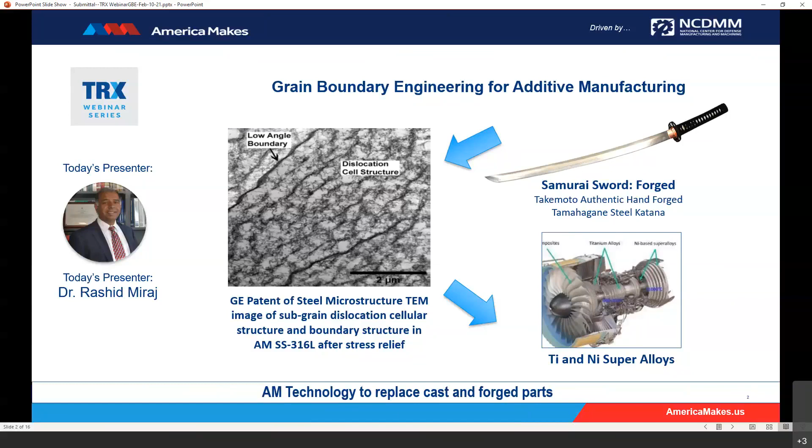Did you change the page?

Thank you. So what problems will be addressed, what objectives secured, and what solution employed? As we all know, AM metals exhibit cracks, low toughness, low plasticity, high residual stresses, and sometimes problems with weldability. Our goal is to improve build quality and performance by varying the AM process, triggering the creation of precipitates, employing cooling strategies, exploring the use of inclusions, all the while considering the effect of defects to secure preferred microstructures.

Our solution seeks to supplement ICME technology with critical modules that address melt pool engineering, grain boundary engineering, phase change, diffusional creep, global-local models, and material characterization and qualification. Tools will optimize grain boundaries, formulate alloy designs, improve microstructure, and identify process parameters to build quality parts.

Well, how will this be possible? Well, I'm glad you asked that question. The ICME tool will accurately predict AM build outcomes, including effects of defects. EBSD visualization software will capture microstructure. Voids and other anomalies will be evaluated. Grains and grain boundaries will be assessed. The impact on quality and life will be quantified.

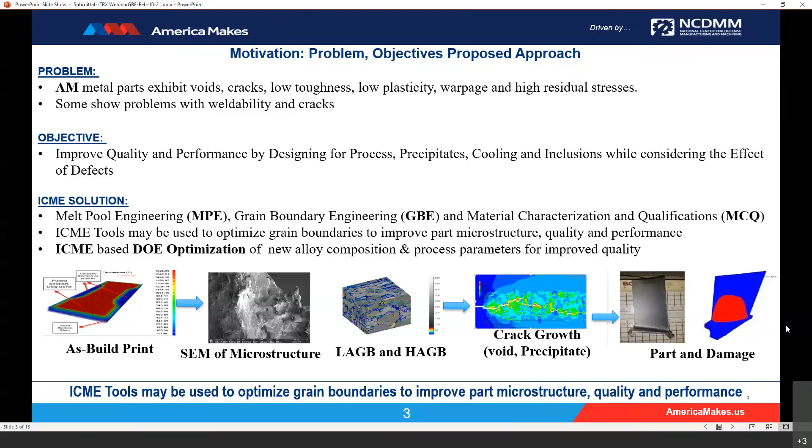So what's the role of ICME in this process? Okay, let's say this one more time. ICME will provide the framework and integrated platform to support melt pool engineering, grain boundary engineering, and material characterization, which will allow engineers to consider grain size and grain boundaries, virtually conduct the build, identify defects and causes of defects, visualize the microstructure, explore options to address microstructure, i.e. alter the print path, add nano or microparticles, to ultimately modify an alloy design and to find the right solution.

The good news is that we are not alone. Experience has shown that ductility and toughness can be addressed by phosphorus and sulfur, durability by chromium, bonding and diffusion by nickel, and there are many more options in the toy box to get the results we'd like. New alloy composition and design would include the effective powder composition, size and distribution on microstructure, effective inclusions on polycrystalline material, and desired improvement of material properties and performance, even fracture and fatigue.

The box at the bottom of the page captures the AM ICME approach and what will be manipulated by tools for grain boundary engineering and new alloy design. As you can see, we can manipulate the print path. We can explore thermal transport, including the development of process maps and the impact of not only inclusions and precipitates, but post-heat treatment, and in some cases, in situ heat treatment.

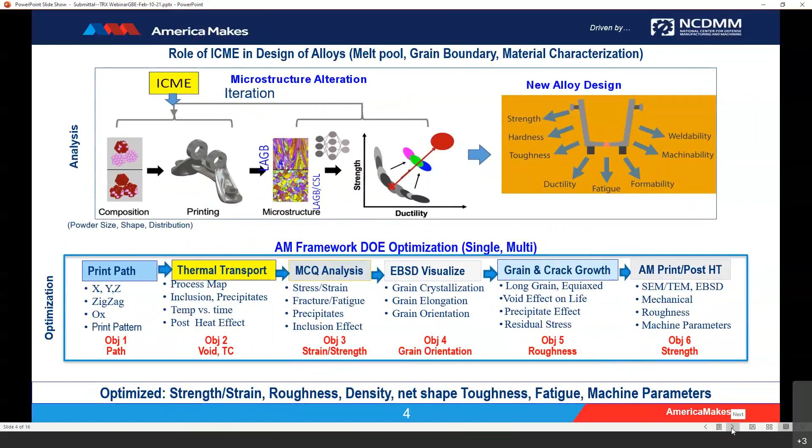Thank you. The reference methods are applied individually and in collaboration with each other, which sounds like optimization. ICME-supported sensitivity analysis and design of experimentation will work to identify an ideal combination if it exists. Solutions may be optimized for strength, strain, roughness, density, toughness, fatigue, and machine parameters, from net shape and warpage all the way to alloy design. Thank you.

Most defects resulting from AM processes are related to thermal behavior. Swelling, keyholes, humping, unfused, balling, delamination are all common concerns related to AM metal. Our thermal management module, TNG, which has been validated for titanium, can predict the dynamic evolution of the melt pool in terms of depth, width, and length. TNG predicts thermal history, thermal state, and material state, and visualizes the heat-affected zone.

The tool can be used to define a dynamic process map that relates balling, humping, keyhole, unfused powder, no melting, incomplete melting, overheating, to laser power and speed settings, or other critical parameters. That process map is shown on the right, and it shows the areas that are stable and unstable in terms of those process parameter settings. In the current example, the zones of stabilities and instabilities were validated for a single track of laser moving at different power and scan speed settings. ICME tools predict manufacturing anomalies and the effect of those defects, as well as identify solutions.

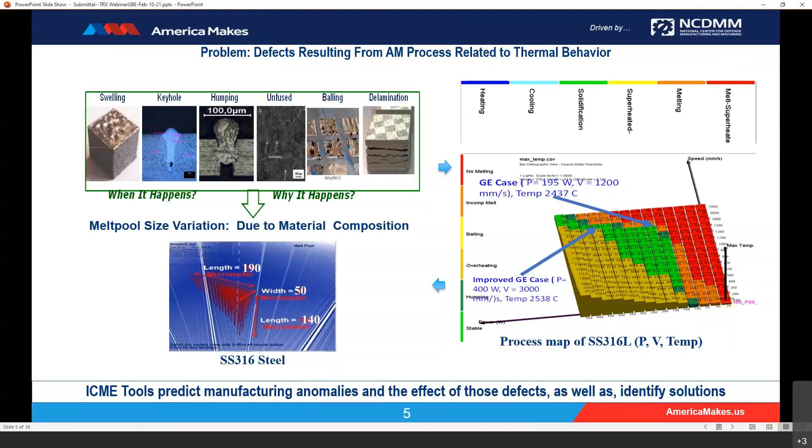ICME thermal management and melt pool engineering exploits the microthermal transport of steel. The thermal history of the three different steels are presented on this slide: stainless steel 316, based on the GE patent; maraging steel, based on the Damascus steel template, talked about a long time ago by Mr. Ashby; and our ICME optimized steel design. As you can see, the GE patent strove for improved strain. Historically, Damascus steel is always explored or driven by the desire for increased strength. Our proposed optimized design tries to grab the best of both worlds based on the strategy we just laid out in previous slides.

When reviewing the thermal history, the highest temperature for GE stainless steel is 3,102 degrees Celsius and 2,000 degrees for maraging steel. The silicon oxide precipitate in the GE stainless has an exothermic effect on the thermal process. The martensite in the maraging steel has an endothermal effect, which causes the temperature to be lower.

From the histogram, it can be seen 36% of the powder remains unfused for the maraging steel as a consequence of the endothermic effect of martensite, which takes out all the heat and does not allow the cooled powders to join or fuse together. For the GE stainless, the percentage of unfused powder is almost zero. This is because of the exothermic effect of silicon oxide, which provides the heat to melt and fuse the powder. The uniqueness of this exothermic effect is free heat to be used in an engineering manner.

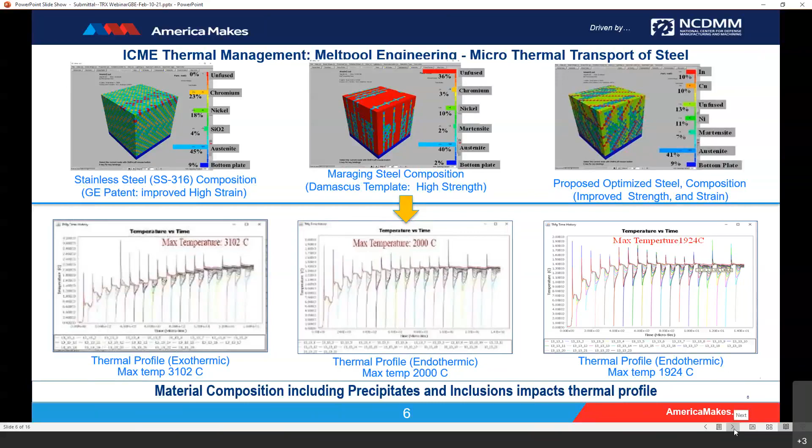ICME prediction and validation of the thermal state, material state, and mechanical strength. Recall the void distribution between the three states, which was a function of fused and unfused powders, and the effect of precipitates and inclusions. Not surprisingly, the same components impact the stress-strain curves for all three systems.

It should be noted that the heat treatment for GE stainless steel improved the strain, but only had a slight improvement of strength. In the case of maraging steel, the inherent heat treatment improved the microstructure and increased the strength, but not the strain. Preliminary investigation with the optimized alloy resulted in an increased strength and an increased strain without heat treatment. The results need to be validated against tests, but the research clearly is moving in the right direction.

And so, the combinations of inclusions, the combinations of precipitation, and selective use of the process of print processing can also produce the desired grain boundary effects. New steel composition, better strength and strain, eliminate the need for post-heat treatment.

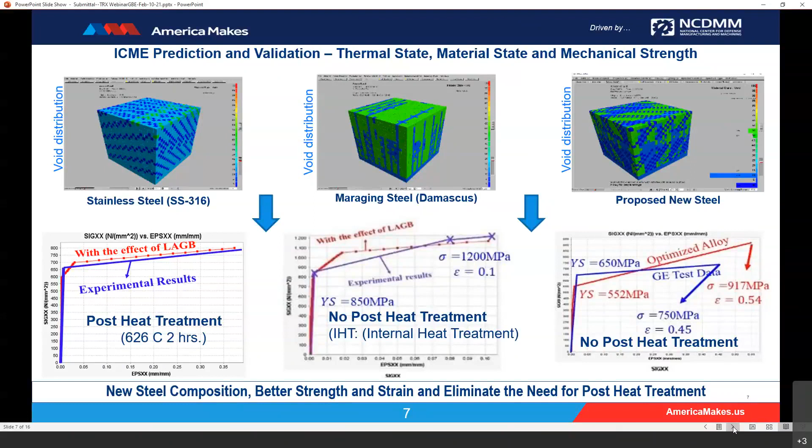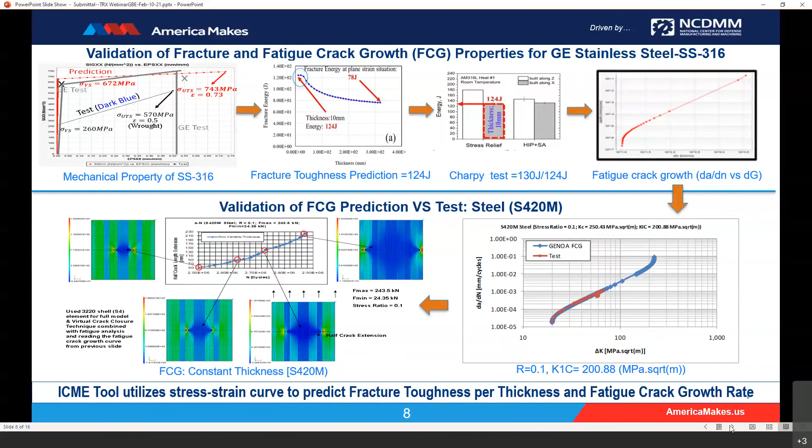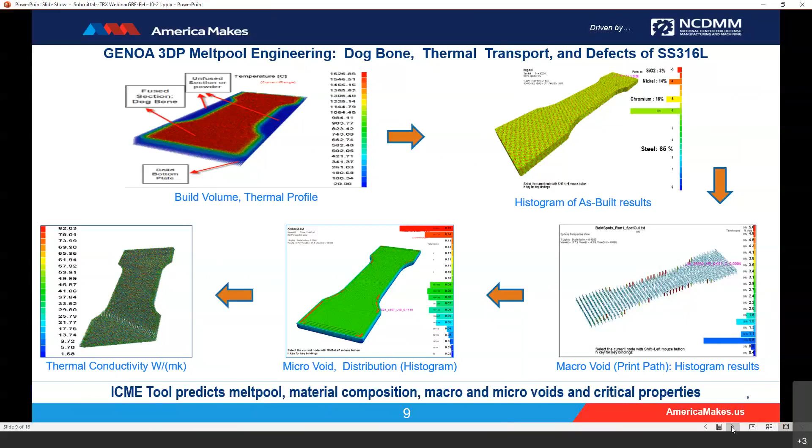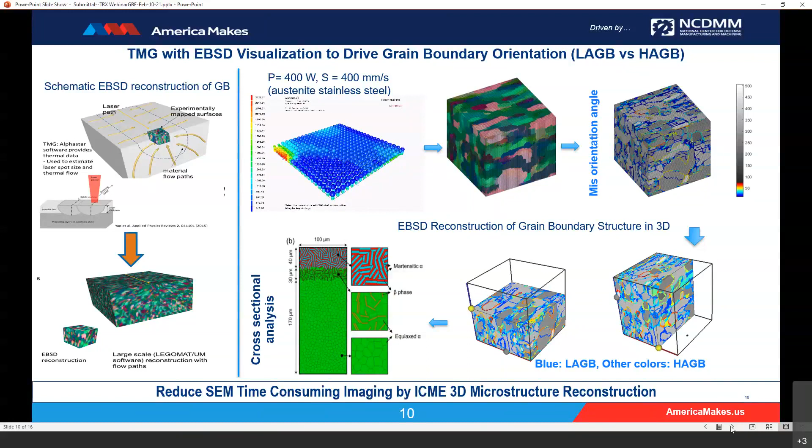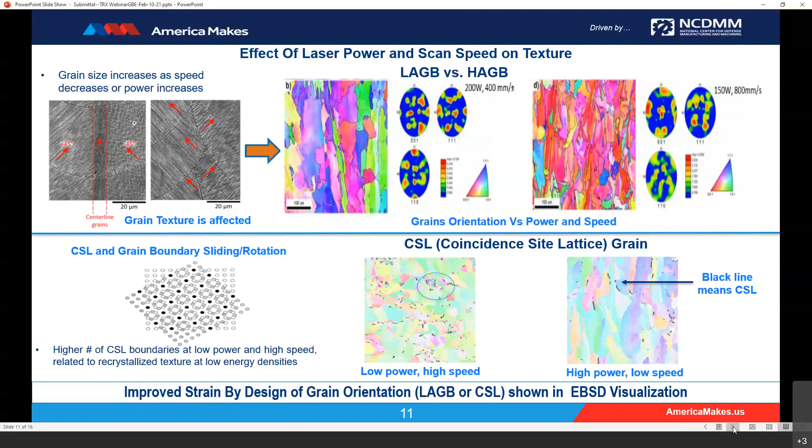And as you can see on the lower left, grain boundary sliding and rotation also can occur in multiple levels. The higher number of CSL boundaries at low power and high speed are related to recrystallized texture at low energy densities. Ultimately, improved strain by design of grain orientation is shown by EBSD visualization. What we're trying to emphasize is this collection of modules allows you to see each component of the process and then optimize based on that individual visualization.

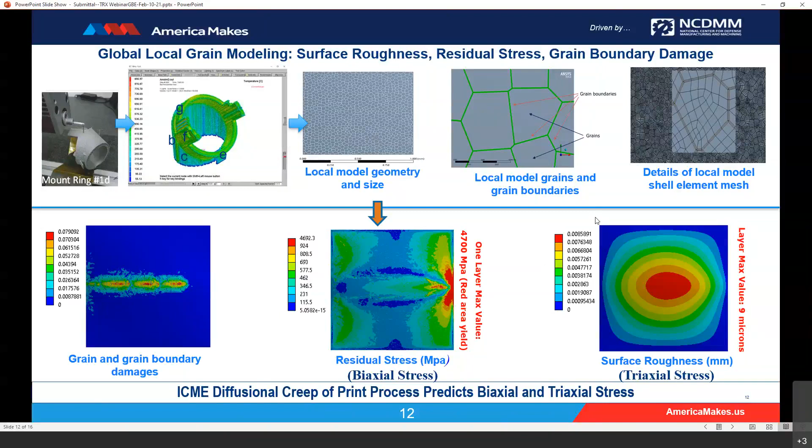The image in the center, again looking at that grain, can predict residual stress, biaxial stress. And finally, for triaxial stresses, we can then predict surface roughness. Ultimately, ICME diffusional creep supports the print process.

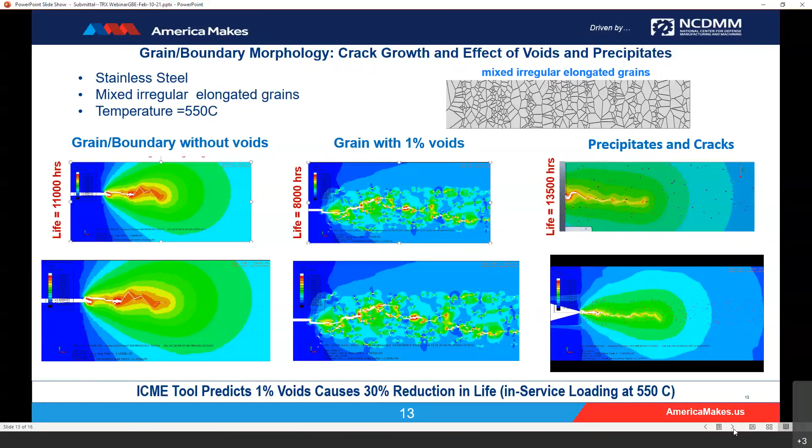You're good. Thank you. Thank you.

This is the AM fabrication and then non-destructive evaluation assessment, which was undertaken in parallel with our program. For the most part, we've talked about computational tools and other modules, which are predicting events. Everything we do is tested and validated in the laboratory. This program is still in its infancy with a lot more work to go, but we've been supported by our partners at the University of Southern California and the University of Michigan to not only help us with visualization tools and predictions, but also to support in testing.

And as you can see in this particular case, we printed 25 specimens with the powder and they were actually 20 layers thick. Each layer was, I believe, 40 microns, so the total height was about 0.8 millimeters. Of the specimens, 12 were subjected to heat treatment at 650 degrees Celsius for 2 hours. Of that, 4 were air-cooled and 4 were water-quenched.

We were able to not only test these and collect the data, but also to see the impact of the quenching, cooling, all the various applications to the tensile test behavior, the stress strain curve, and the performance of the materials. Not only did we measure tensile test as built, tensile test as water cooled, you can see there's slight variations. Again, more testing needs to be undertaken. We need to translate what we learned virtually and correspond to what we will find through physical experimentation to update our knowledge and update our solution.

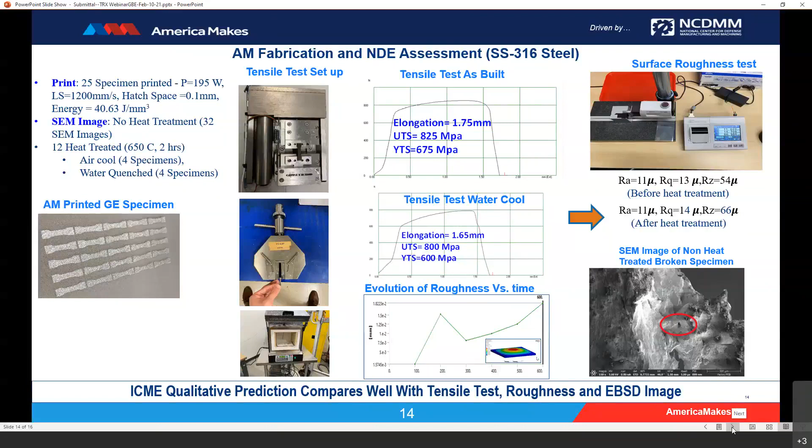Well, that's the conclusion of our work. Let's summarize what we have. An ICME approach was conducted for stainless steel microstructural changes and effect of nano-inclusion precipitates during the AM and after the AM process. We developed multiple modules to support this. We talked about a thermal transport model, a material characterization model, a creep diffusion model, a phase diagram model, and as you saw, an EBSD texture reconstruction technique for visualization.

Lessons we learned in this process are that long grains translate to high strain, precipitates can improve strength and decrease crack propagation, residual stress increases elongation, inclusion increases both elongation and strength, voids can increase crack propagation, and hydrostatic pressure affects strength. I think a further conclusion of this is that sometimes items that you think would have a negative effect, if properly organized with other considerations, can have a positive effect. That's why bringing the ICME tool to understand the overall process and optimizing that can help you find the best solution among a large variety of options.

Our next steps are to continue the validation of the ICME tool and explore the behavior with other material systems, including Inconel and aluminum alloys.